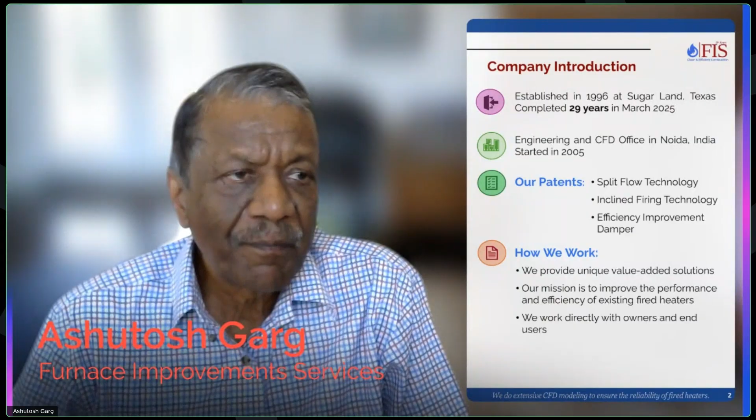We have our engineering office in Noida, India, which we started in 2005. We have 3 patents. We have a split flow patent on increasing the capacity of fired heaters. Then the inclined firing technology is on burners, how to incline the burners and reduce the tube metal temperature. The third patent is efficiency improvement dampers.

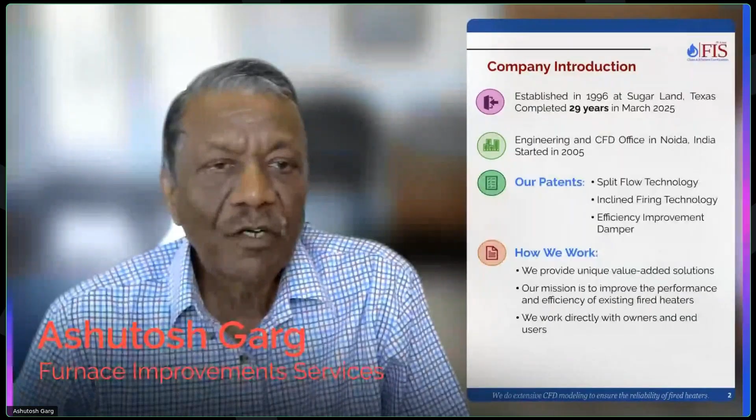And how we work is actually a very interesting story I want to tell you. In 1996, when I got a chance to tour the Houston area refineries, Houston area has 6 refineries and almost 300 heaters. And no company was looking at maintaining or taking care of existing heaters. Every company was looking at supplying new heaters. So we found this niche of talking directly to the end users, talking directly to people like you who are listening, and finding out what is wrong with the heater, what is the issue.

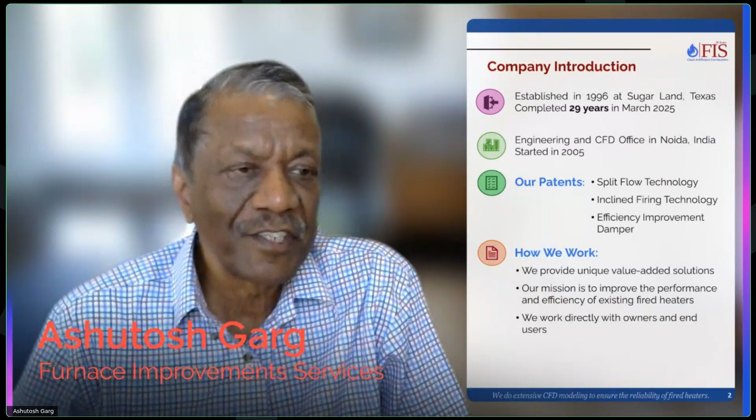So we started an exercise of direct communication with the end users, a doctor-patient relationship. And our focus has been improving performance of existing fired heaters, steam reformers, CO boilers. We work directly with owners, and we always try to provide unique value-added solutions. We take pride in doing high-quality technical work, keeping schedules. Because of the time difference, we are able to work around the clock. And our philosophy is do it once, do it right.

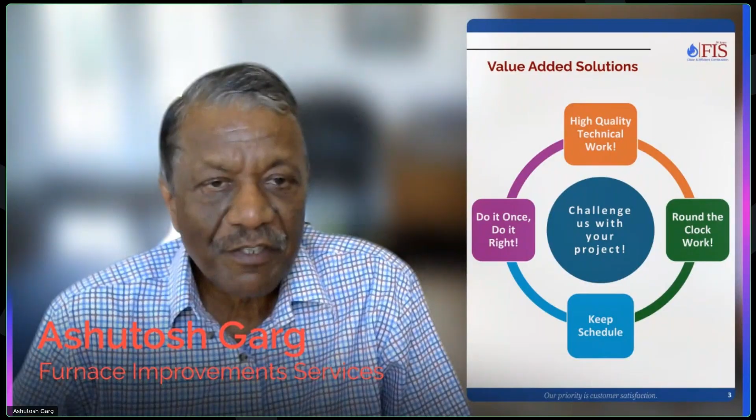I encourage you, or I request you, to send us your worst heater, and we promise we will make it the best heater. We have done it several times. So if you have a heater which is giving you troubles, which is not achieving efficiency, capacity, emissions, anything, send us the inquiry and we will make sure it is the best heater.

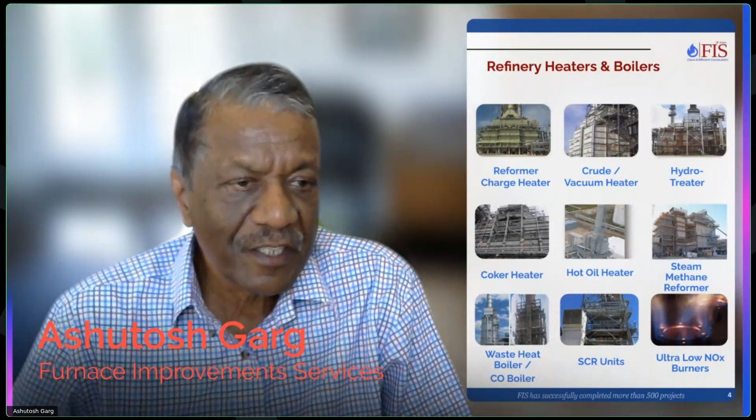We focus on refinery heaters, boilers, steam methane reformers, SCR units, ultra-low NOx burners. We focus on all types of combustion equipment in the refinery. We don't do sulfur plant units, sulfur heaters, but everything else. Most of our business is based in the US. Our largest client is Phillips 66, but we have long relationships with Countrymark, CITGO, Delek, Marathon, Hindustan Petroleum, and a lot of other refineries throughout the world.

Another thing I want to talk about is Siddharth has worked for the past 6 months. What he has done is he has taken my 50 years experience and distilled it into 3 hours of training for operators. I can tell you that it is very important to train your operators continuously so that you get the best results.

A lot of times when I go to the refineries, I find the operators telling me they are afraid of touching the stack damper, afraid of touching the burner, so they just leave it fully open. As a result, you have a very inefficient heater operation. So we have developed this heater fundamentals class, about 3 hours for operators. They can do it anytime from their control room, from their home, and the early bird pricing is only $95. If you're interested in training your operators, please contact us for this online operator training.

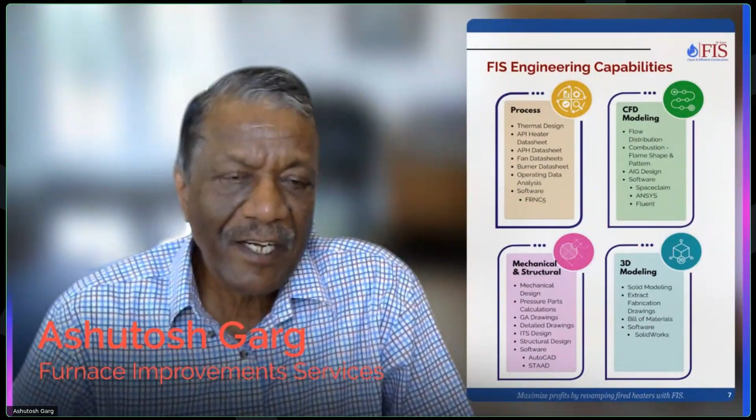As far as engineering capabilities are concerned, we have process, CFD modeling, mechanical structural design, 3D modeling. We do turnkey projects - it's not just consulting or engineering. We do design, engineering, supply, and if you want, we can even take care of the erection. So we do complete projects, and we can do the project very fast, anywhere between 8 to 12 months.

We do a lot of CFD. Our strength is process. So we do combustion, airflow distribution, fan suction, discharge ducts, AIG, and SCR units.

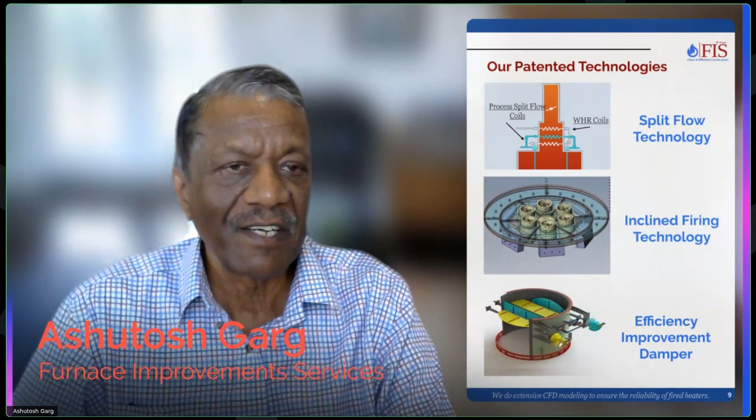Already talked to you about the technology. So inclined firing technology is related to burners, and we incline the burners anywhere between 3 to 7 degrees. You can see over here. Just by inclining the burners, we are able to get almost 100 to 150 degrees lower tube metal temperatures. We have installed it in about 12 heaters now.

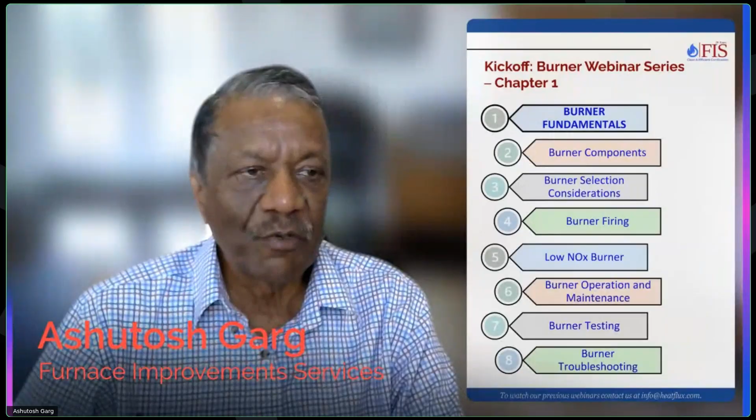Okay, so let's come back to our burner webinar. This is the course my team has put together. We may change it a little bit, but we will talk about burner fundamentals, burner components, burner selection considerations, burner firing, low-NOx burners, burner operation and maintenance, burner testing, and burner troubleshooting. We'll try to complete this course in about a year's time, 8 classes or maybe 10 classes, we'll see. But that is what we are trying to do over here today.

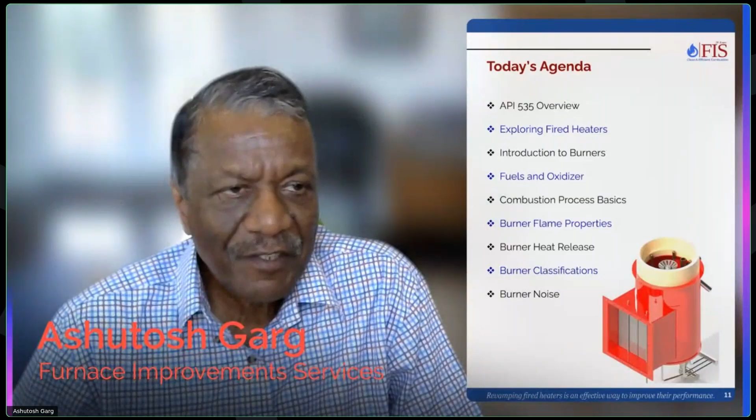So today's agenda is basically to talk about API 535, talk a little bit about fired heaters, burners, fuels, air, flames, and all those types of basic things we will be talking about today.

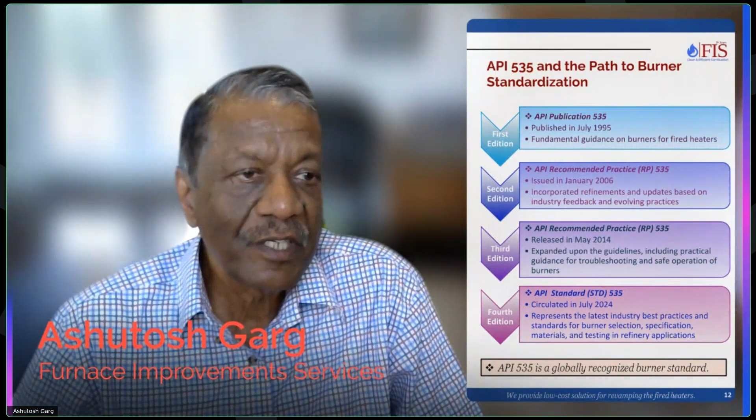So I already talked to you about API 535. What the industry is trying to do is put all their collective wisdom together and come out with burner specifications. The first edition came out in 1995. Then the second edition came out in 2006. The third came out in 2014. And the next one came out just recently, I think it was 2024.

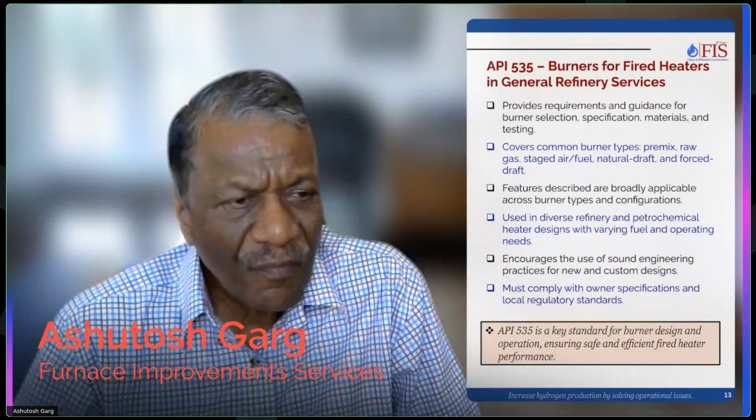If you don't have a copy of API 535, I suggest you should buy it. It's a very good document, you can even call it a Bible on fired heaters. It covers all types of burners, all types of configurations, sound engineering practice - especially if you are planning to buy burners or buy heaters, then you need a good source of information and specifications for burners, and API 535 is a really good document you may want to have.

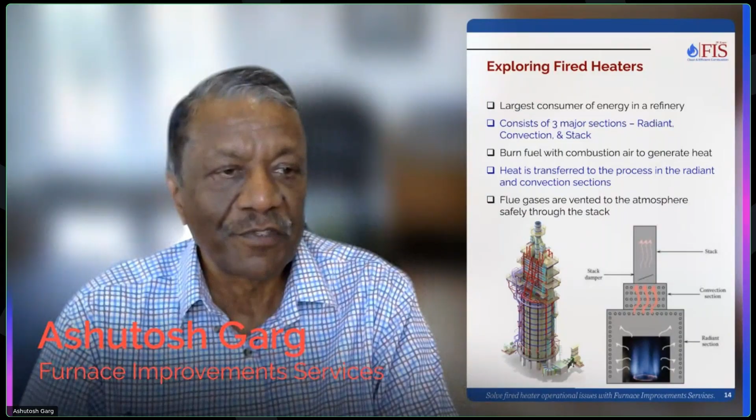So what is a burner? A burner is a device for combusting fuel gas, fuel oil, or any fuel with air or with oxygen also in a heater or a combustion chamber, and produce the desired flame pattern.

That's basically the function of the burner. You want to make sure that the air to fuel ratio is correct, the flame shape is correct, the combustion is stable, and it ignites safely. So there are a lot of requirements on burners which should be met.

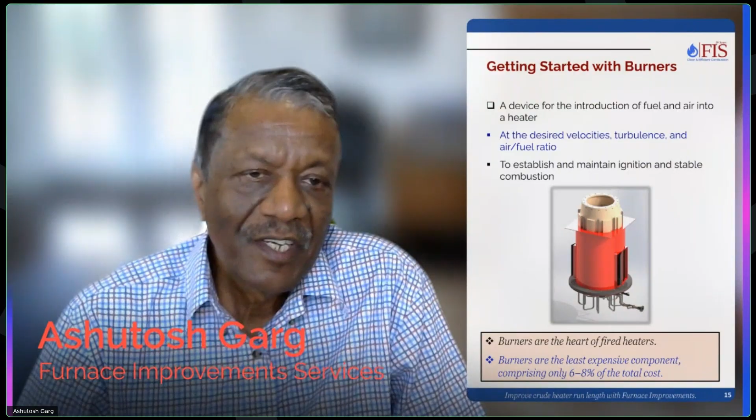As I said, burners are the heart of fired heaters. If you think about the cost of the burners, most of the time the cost of burners is insignificant compared to the heater cost. If your heater costs $10 million, the burners may be no more than 600,000 to 800,000, maybe $1 million. So in terms of capital expenditure, the burners are much lower, but they are a very important component when it comes to the operation of fired heaters.

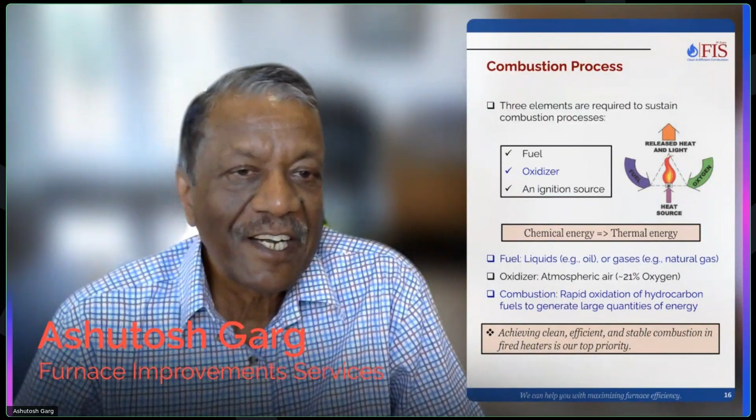Mankind has known combustion for, I don't know, 10,000 years, something like that. And combustion has been central to human survival. In the day, you get sunlight, but in the night, you have to have fire or combustion to generate heat, to generate electricity. So combustion is very basic.

And it needs three things. It needs fuel, then it needs oxidizer or combustion air, and a source of ignition. One thing which I have not told you is the fuel and air needs to be in the right proportion. And what happens in combustion is chemical energy gets transferred to thermal energy.

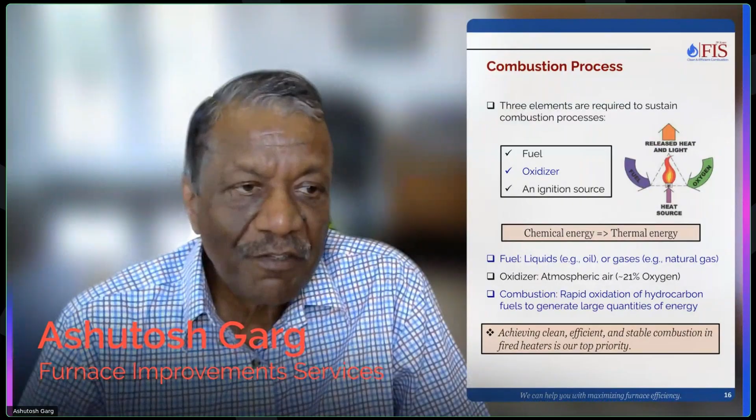So our fuels are hydrocarbons, liquid or gases. Oxidizer is combustion air or atmospheric air. Air has 21% oxygen, 79% nitrogen. And combustion is a rapid, irreversible oxidation reaction. That's the definition of combustion.

I'm sure most of you would have experienced Bunsen burners in your high school or college, Bunsen flames as part of the chemistry class. So what is our function or objective? Achieving clean, efficient, and stable combustion in fired heaters. That's what our practice is.

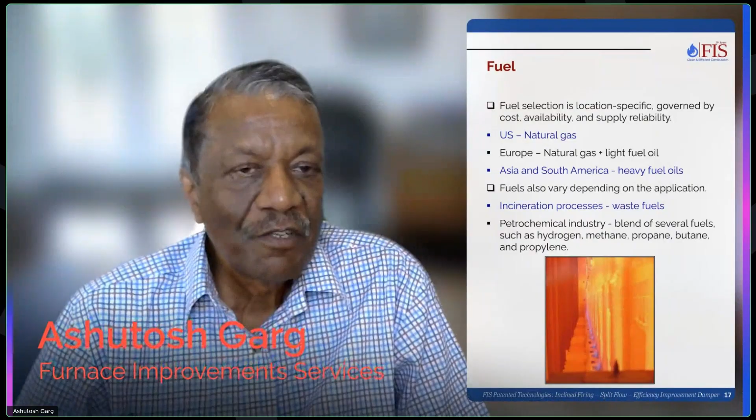There has been a lot of change in the industry over the past, I would say about 100 years. So in the old days, the fuel used to be mostly gas, but it was supplemented by fuel oil, because fuel oil was a byproduct of crude distillation. So most of the burners used to be combination burners or fuel gas fired burners. And that's how the industry worked.

But people realized that oil causes a lot of pollution, lots of nitric oxide emissions, nitrogen oxides, lots of sulfuric acid dew point corrosion, sulfur oxide in the atmosphere. So fuel oil has practically been banned in most parts of the world. There are some places where you do fire fuel oil - I'm thinking some clients in Europe, some clients in Asia, South America.

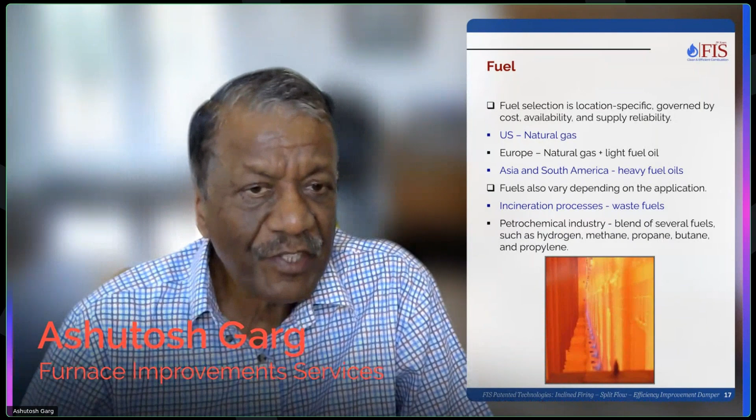We did a project recently for Jamaica, so they had fuel oil firing as an option. But things have changed, and most clients fire fuel gas now. Mostly it is natural gas, but it could be other gases also. In a refinery, you fire whatever you cannot sell. So anything and everything which cannot be sold is put into the refinery fuel gas header, and that's what you fire.

So different fuels produce different types of flames. Liquid fuels typically will produce luminous flames. Gaseous fuels will produce non-luminous blue or pinkish flames.

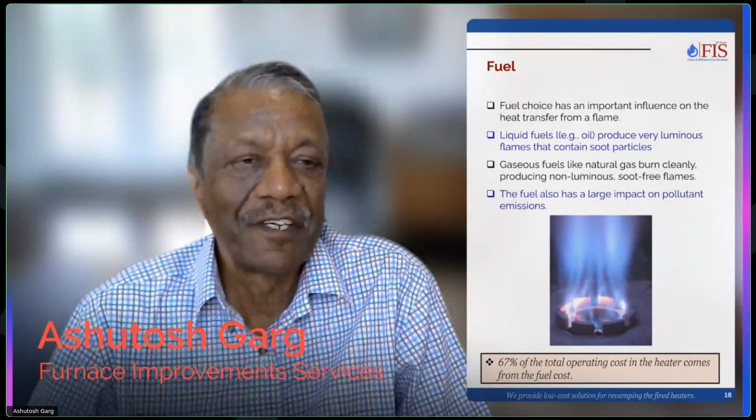I don't know how many of you have experience of fuel oil firing, but there is a difference of day and night between gas firing and oil firing. Oil firing is very, very difficult. So in one sense, once fuel oil has been banned, I would say it is good riddance. The life of operators, the life of engineers have become a lot easier with gas firing. So I'll stop at that - I can continue on burners and fuels and keep on telling you stories about my experience with fuel oil firing.

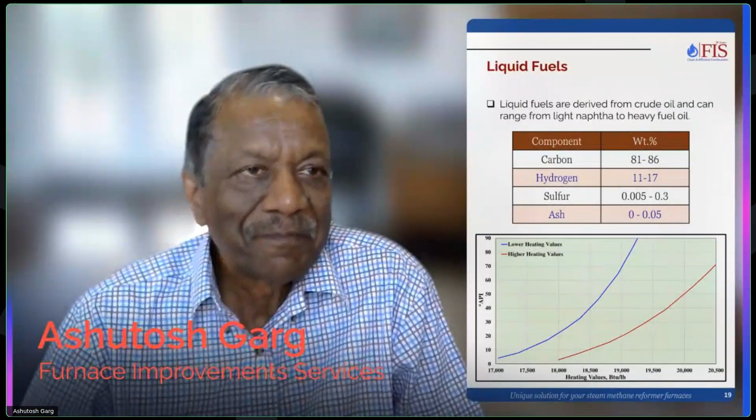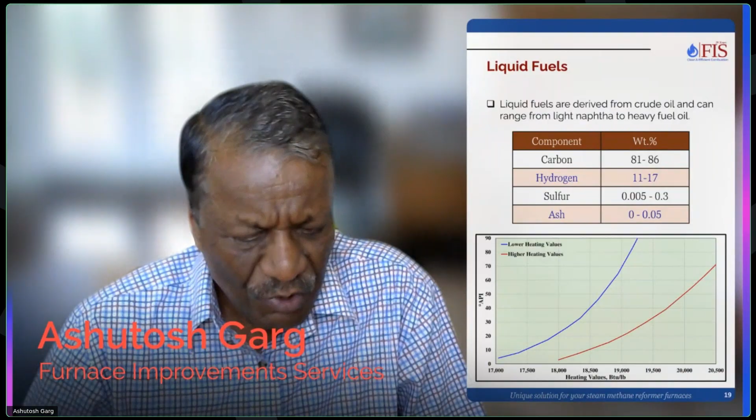But let's move on. So liquid fuels can be light naphtha all the way to heavy fuel oil, Number 6. And typical composition of carbon, hydrogen, sulfur, ash - what my team has put over here is a very clean fuel oil composition. I remember while I was in India, we used to burn heavy fuel oil, which had a lot of sulfur, almost to the extent of 5%, not anymore. And we had sodium and vanadium - high sodium, high vanadium fuels, which would cause lots of issues.

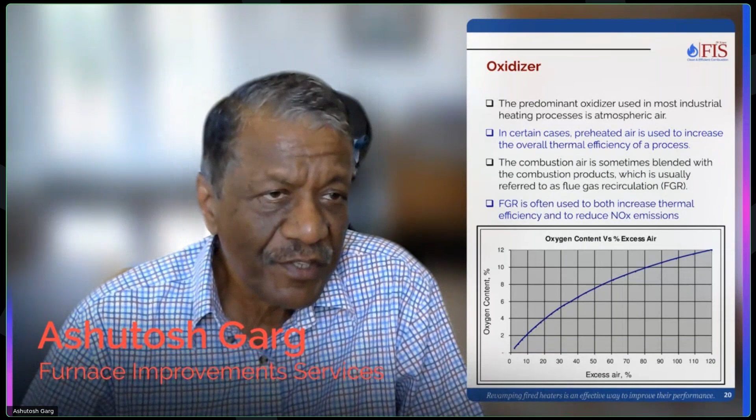As far as oxidizer is concerned, I think we are very lucky that combustion air or atmospheric air is free. Some people may put oxygen instead of air, so they do that. Some people use preheated air to improve the overall efficiency - they install an air preheater. There are also some installations where we have used flue gas recirculation to reduce NOx. Typically anywhere between 15 to 30% of flue gas is recirculated to reduce NOx emissions.

So I said in the beginning, when I talked about combustion, that one of the things you have to watch out for is the right proportion of air and fuel gas. So you have to make sure that the proportion of fuel and air is right.

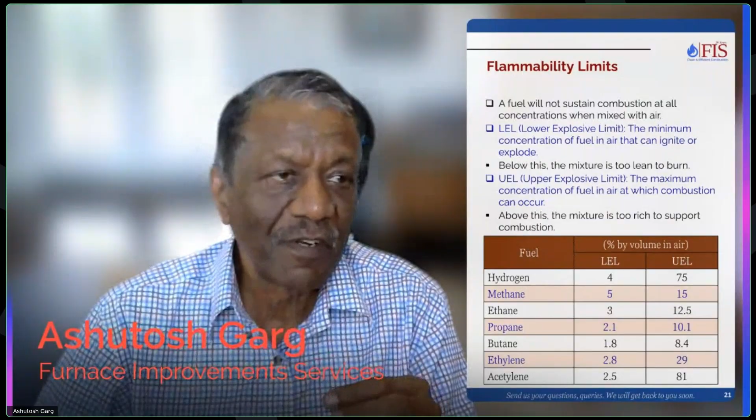So industry has two limits, LEL and UEL. LEL is the lower explosive limit or lower flammability limit, the minimum concentration of fuel in air which can ignite safely. Below this, the mixture will not burn. UEL is the upper explosive limit, the maximum concentration of fuel in air at which combustion can occur.

So you have to make sure that you are either below the LEL or between LEL and UEL. Anytime there is a shutdown in the industry, the safety guys go to all the enclosed equipment and check the presence of combustibles. They have an explosive meter, they check the combustibles concentration, and then they declare it is safe to enter or safe to start the heater. They're basically checking that you are below LEL.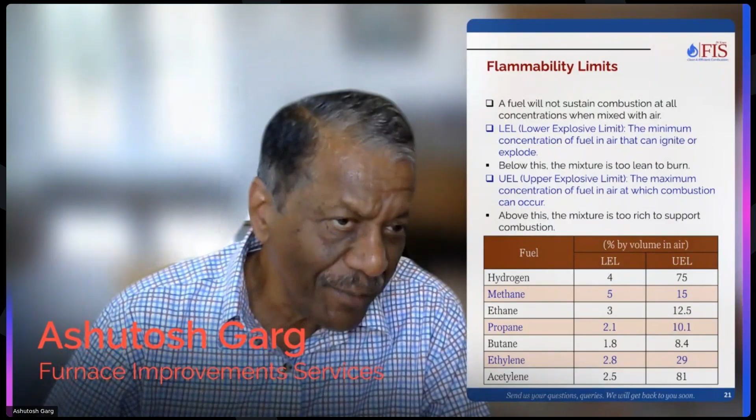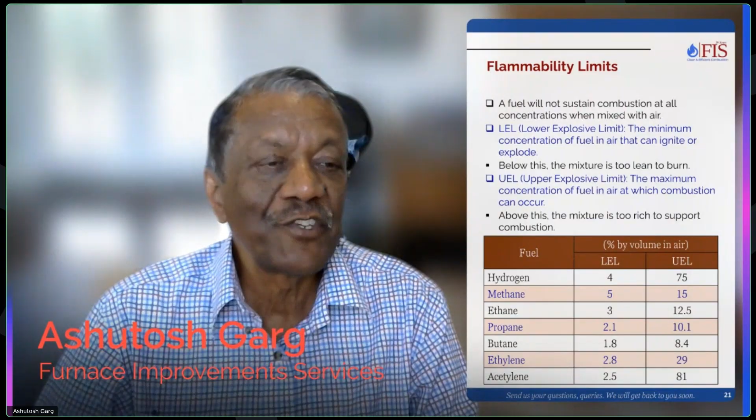These are the limits of different fuels: hydrogen, methane, ethane, propane, ethylene, acetylene. You should look at the first one and the last one - they are both very explosive. Hydrogen is anywhere between 4 to 75%. Acetylene is between 2.5 to 81%. So you can see how these things could be dangerous if you don't treat them carefully.

Okay, once we have the fuel and the mixture, we can have three conditions. First one is stoichiometric - stoichiometric means you give the right amount of air, the right amount of fuel, and you want things to burn. If it was a perfect world and you had unlimited residence time and unlimited mixing energy, you would get a good flame. But in the real world, it won't be perfect.

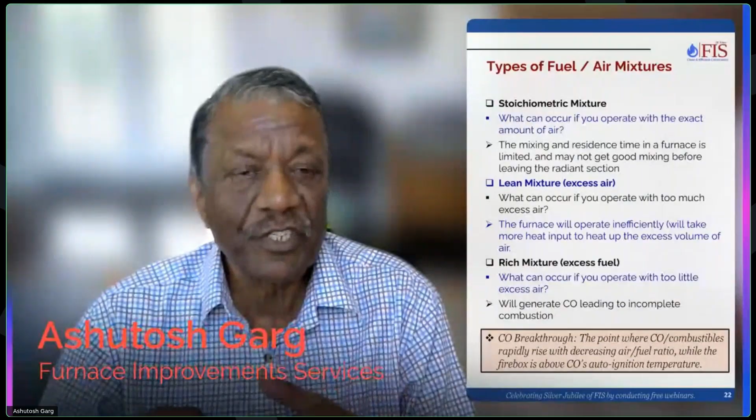I can tell you from my experience of doing stoichiometric combustion to produce inert gas. We used combustion to generate inert gas, and stoichiometric mixture or substoichiometric mixture combustion is very, very difficult. So most of the time what you have is a lean mixture - you give excess air. Air is free, so you can afford to give excess air, and that ensures the combustion is complete.

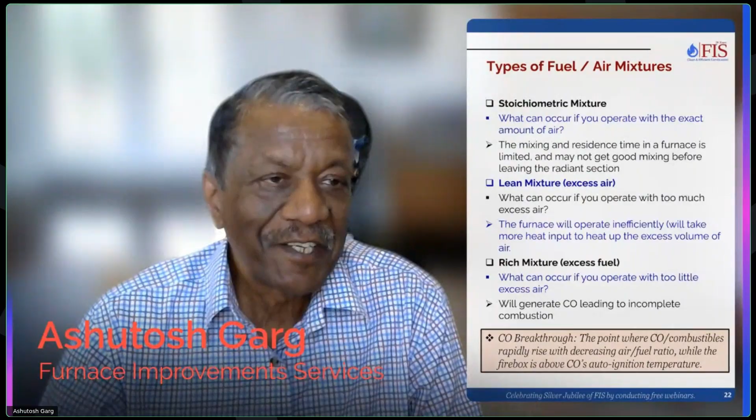But if you give too much excess air, you will be losing heat actually, because you will be heating up that extra air or extra nitrogen. So you have to make sure you are in the right range. Then you have the rich mixture - if you try to put more fuel, most of the time you will have CO breakthrough taking place, a high CO slippage. Industry puts a limit of 50 ppm for CO, since CO is poisonous too. So we have to make sure we don't exceed more than 50 ppm CO in our combustion.

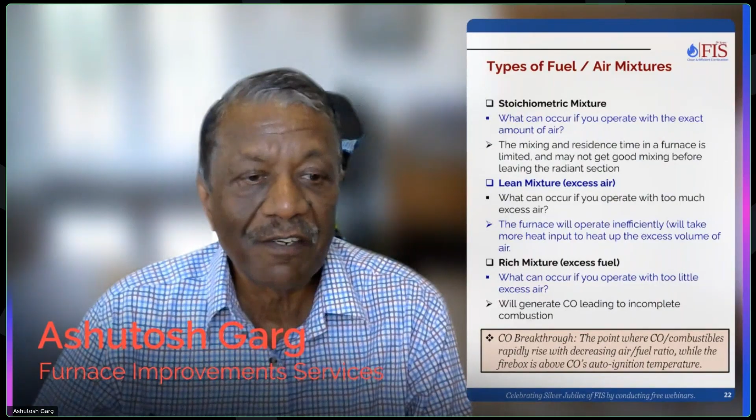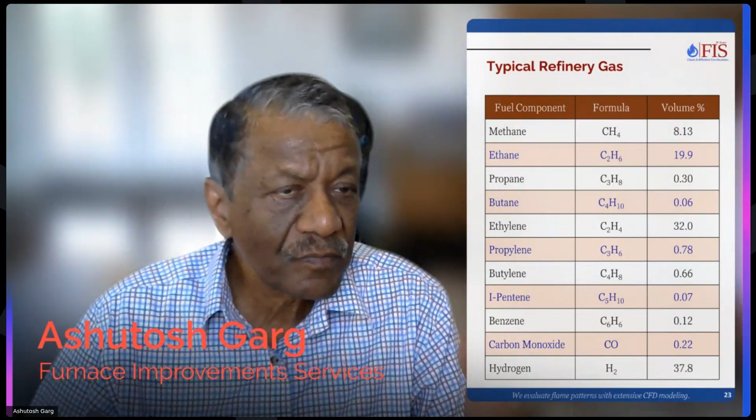This is a different fuel gas, has 32% ethylene, which normally is not there. But fuel gas in a refinery is a dumping ground, you know.

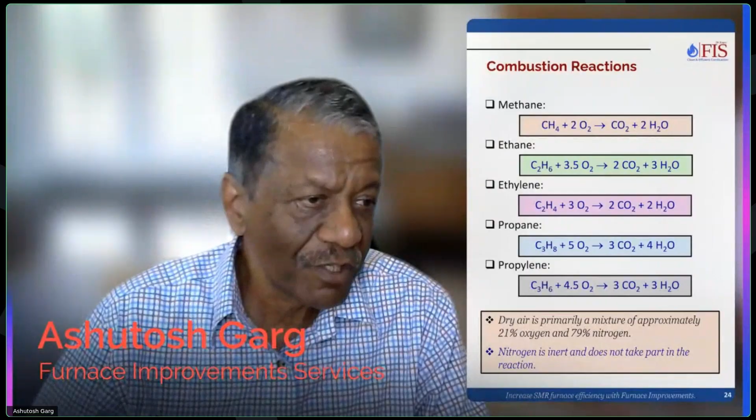I don't need to go over these - these are simple chemical reactions, balanced equations. All of you know we have hydrocarbon plus oxygen, and complete combustion produces carbon dioxide and water vapor. So these are equations - we can add nitrogen also. For each molecule of oxygen, we can add 3.76 molecules of nitrogen, on this side as well as on that side. Nitrogen does not take part in the combustion reactions.

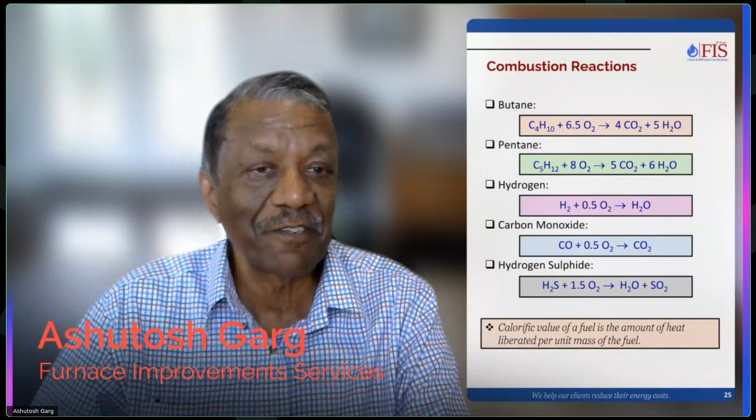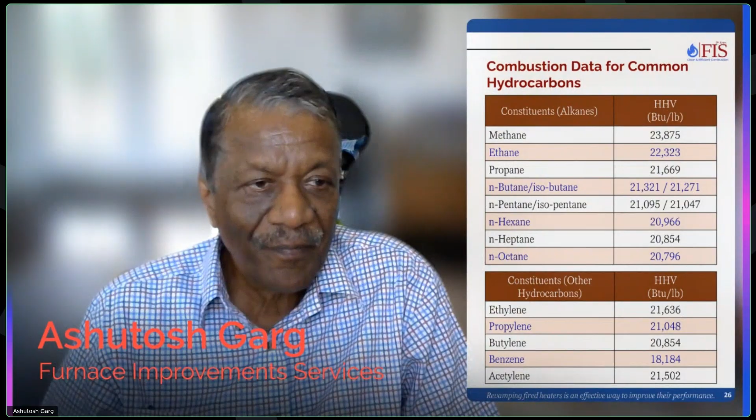For the last 30 years in the US, the stress was on NOx - reduce NOx, get low NOx burners, get SCR units, all those types of things. And suddenly in the last 5 years, even though we knew it for 50 years, the stress has been on CO2 removal. They are saying that if you don't reduce the CO2 concentration, global warming will take place. So now the issue is reduce the formation of CO2, or produce CO2 but then recover it and put it into the ground. So things have been changing.

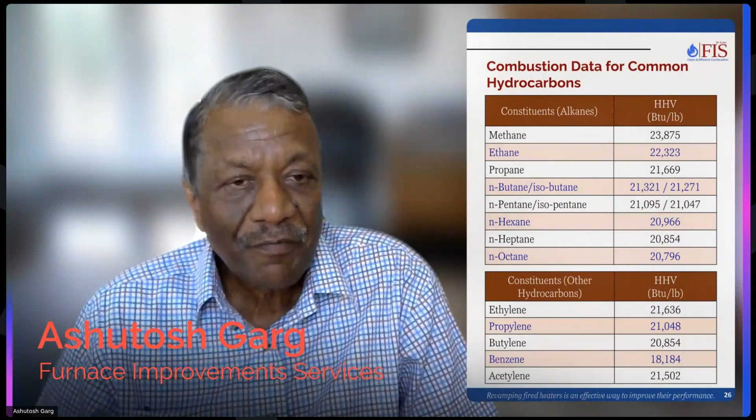Things have never been the same - that's what I saw actually. We had spent almost the last 30, 40 years working on NOx. NOx was actually only in ppm, maybe 500 ppm at the most, down to 100 ppm. But when you talk of CO2, we are talking of 10 to 12% of CO2 being generated in the combustion. So anyway, let's continue - I get deflected.

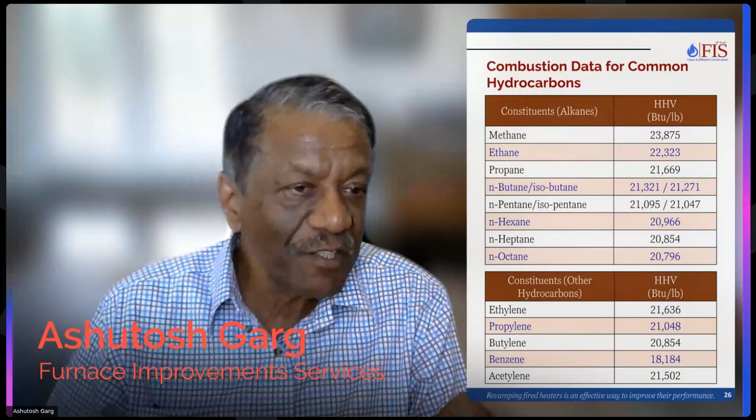So heating values - we have different heating values. I'll just talk about this in a minute, but these are the heating values of hydrocarbons. And if you see a trend, you'll see more or less everything is around 20,000 BTU per pound. So that's really good actually, in one aspect - on a per pound basis, all these compounds generate almost similar amounts of heat.

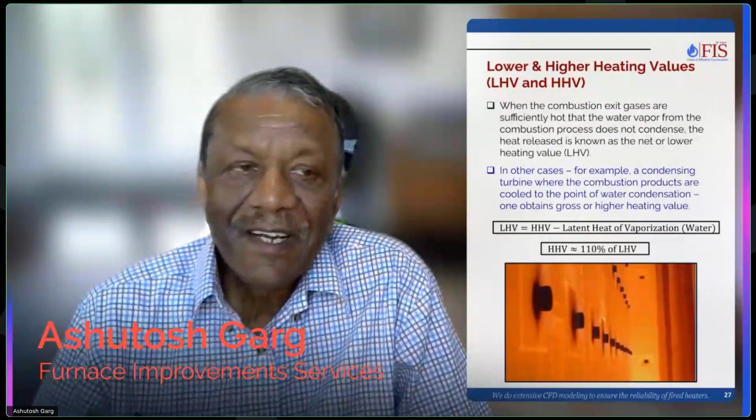So what is HHV and what is LHV? LHV is the lower heating value and HHV is the higher heating value. Lower heating value means when the flue gas we have generated has carbon dioxide, water vapors, nitrogen, and oxygen. These are the 4 components. So when the water vapors remain in the vapor form, the amount of heat released is known as lower heating value.

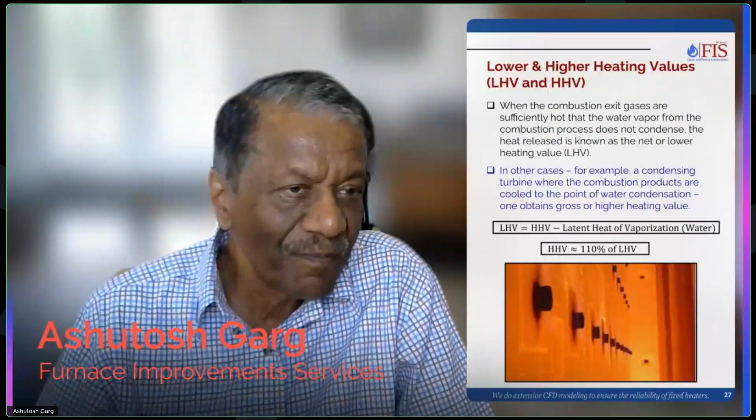And when those water vapors are condensed, giving out additional heat, then we call it a higher heating value. So lower heating value is higher heating value minus latent heat of vaporization. And a thumb rule in the industry is higher heating value is 10% higher than the lower heating value.

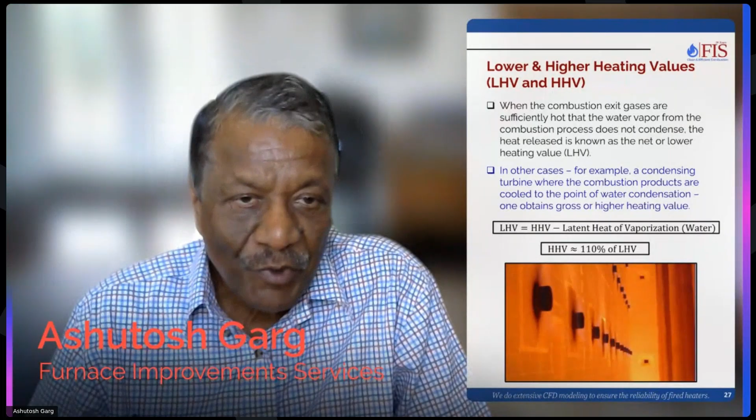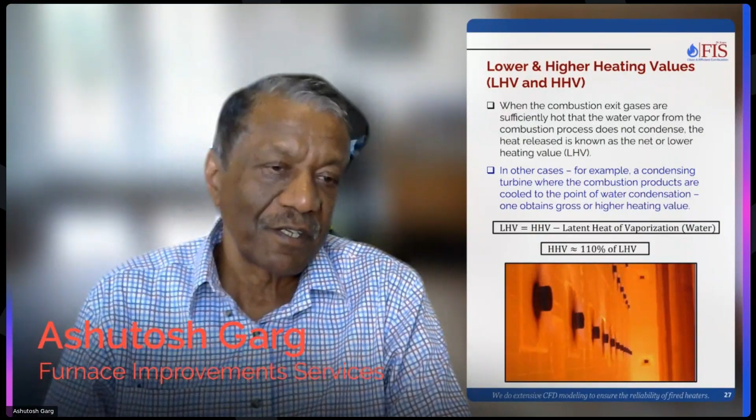Just to note one point that the process industry, the heater industry, works on the lower heating value basis, LHV basis. The utility industry, the boiler industry, and the EPA, they all work on the higher heating value basis. That's a difference. I don't know what is the reason. Maybe the boiler people came first, boilers have been there for 400 or 500 years. So whatever boiler people did, that became standards. But you just need to be clear about what is LHV and what is HHV.

Another thing we want to talk about is Wobbe Index, and it is an index to show whether gaseous fuels can be interchanged. This was more applicable when we had premix burners. If you are aware or not, I think 60, 70, or maybe 80 years ago, everything used to be premix burners in the refinery. And that's where Wobbe Index became very important for interchangeability. Suppose the refinery fuel gas composition changes, you want to make sure your burners will still be working.

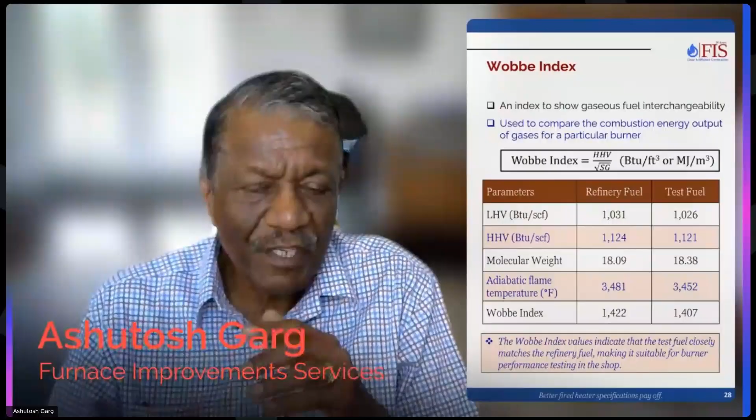So Wobbe Index was basically higher heating value divided by the square root of the specific gravity. And if you are within plus minus 5% of the Wobbe Index of the design gas, you could fire the same fuel without making any major modifications. So that was the significance of Wobbe Index. It is not relevant in raw gas burners, nozzle mix burners, or all these natural draft, ultra low NOx burners. There are very few pre-mixed type of applications.

So these are the Wobbe Index values, and you can see hydrogen or methane - methane, you cannot substitute propane, or vice versa. You can see hydrogen and methane are pretty close, but still they're about 20% off. You just want to be 5% off.

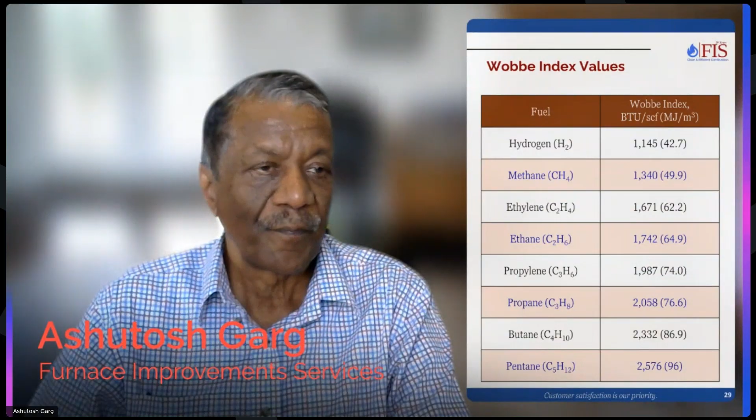So let us see what we get out of combustion. First of all, the combustion products are known as flue gases, I'm hoping all of you know that. So there are several components. Carbon dioxide is the main, could be 8 to 10% in gas fired, 10 to 12% in fuel oil fired. Water vapor, 10 to 12% in natural gas, 8 to 10% in fuel oil.

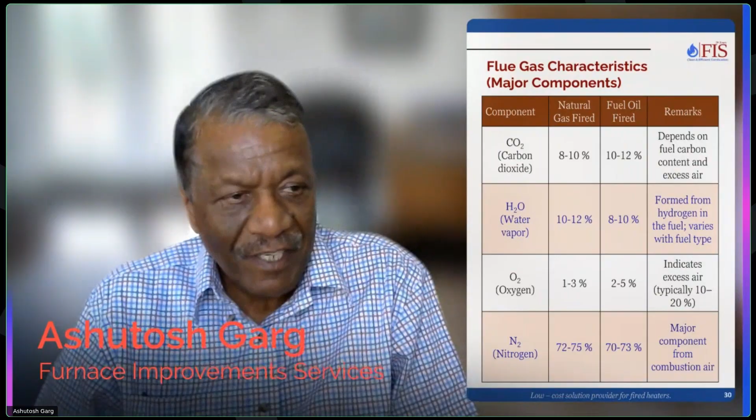Oxygen, typically 1 to 3%, in fuel oil firing it will be higher. Nitrogen, 72 to 75%, in fuel oil it will be a little less. And then we have pollutants: carbon monoxide, NOx, sulfur dioxide, unburnt hydrocarbons. So these are the important pollutants, and we have to ensure that their concentration does not go higher.

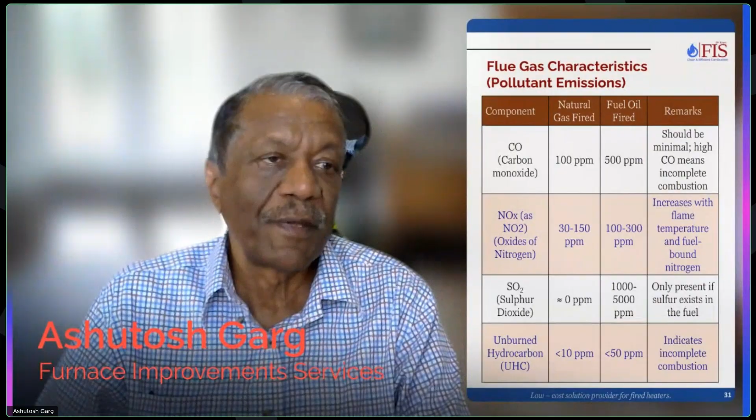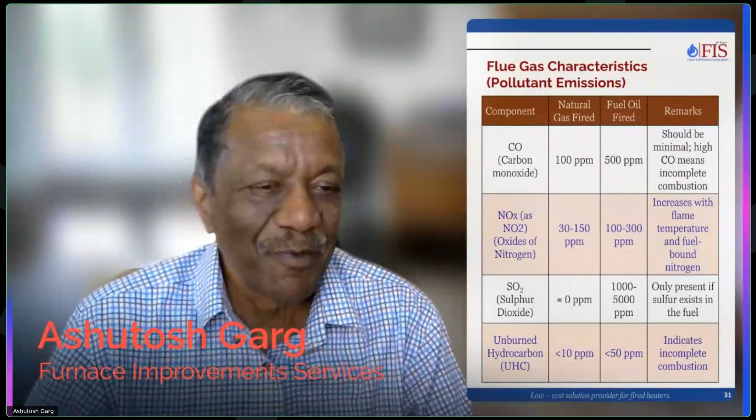If you see over here, CO could be an issue with oil firing. NOx definitely is an issue with oil firing. Sulfur could be an issue, yes, if sulfur is there in the fuels, and unburnt hydrocarbon too. As I said, oil firing is very difficult, so thank you - we are not doing oil firing anymore these days, we are only struggling with gas firing.

So another parameter you need to understand is ignition temperature, or auto ignition temperature. That is the lowest temperature required for the fuel in the air to spontaneously ignite in the absence of an ignition source. So if you heat methane to about 1300 degrees along with the air, it will automatically burn. At this point, you don't need an external source of ignition - it will ignite automatically.

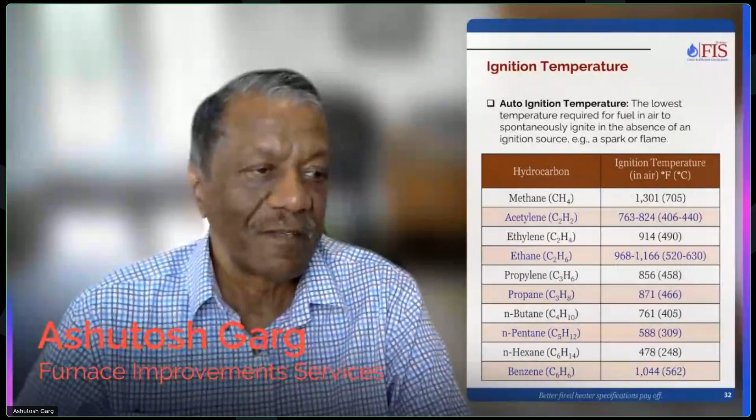Flame temperature is a very important parameter. It's a theoretical number calculated by taking the heat generated by the fuel and dividing it by the flue gas mass and specific heat. Actual flame temperatures, what we see or measure, are much lower because of heat losses.

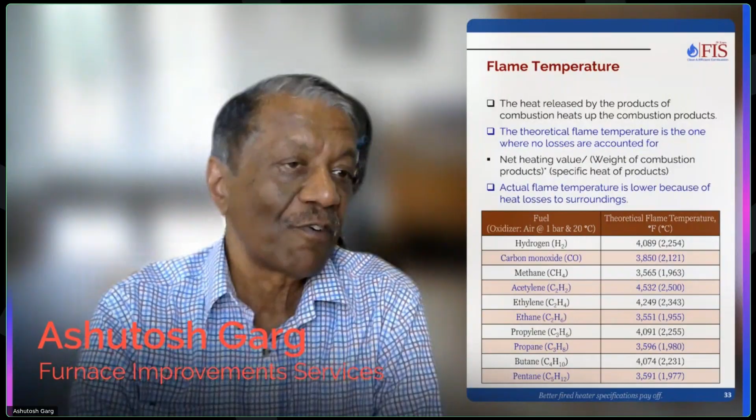Hydrogen burns very hot. Acetylene burns at 4500 degrees F. You must have heard of oxyacetylene torch for cutting metals, and one reason we use acetylene is because it's the hottest flame. But even so, all these numbers are very high. There is no material which can stand these temperatures. 3,000 to 4,000 degrees is very, very hot.

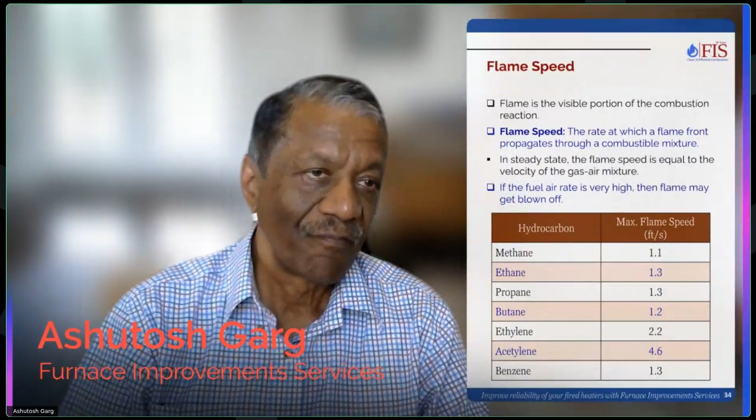What is flame? Flame is the visible portion of the combustion reaction. That's basically the definition. Combustion may be taking place all over, but the visible or hottest portion of the flame we define as a 2000 ppm CO boundary layer. Flame speed is the rate at which the flame front propagates through the combustible mixture. In steady state, flame speed is equivalent to the velocity of the gas-air mixture.

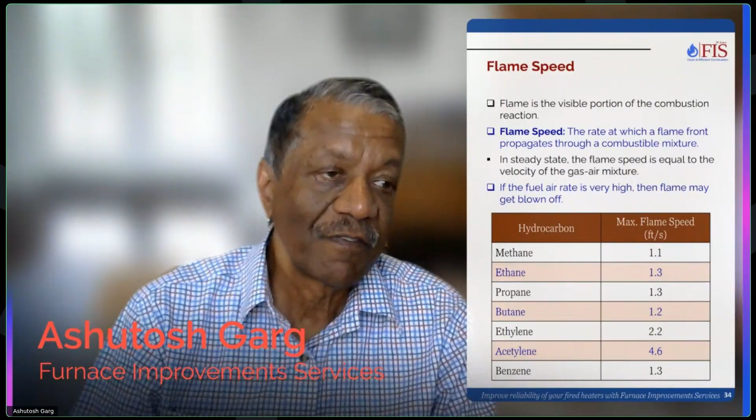If the fuel-air rate is very high, the flame may get blown off. Ethane and propane burn at the same speed. Acetylene burns almost 4 times faster. We're missing hydrogen in this table, but hydrogen burns even faster, 7 times, almost 7.5 feet per second. So hydrogen burns very fast - that's something you have to take note of. If you're thinking about burning hydrogen in your heaters, think about the flame speed.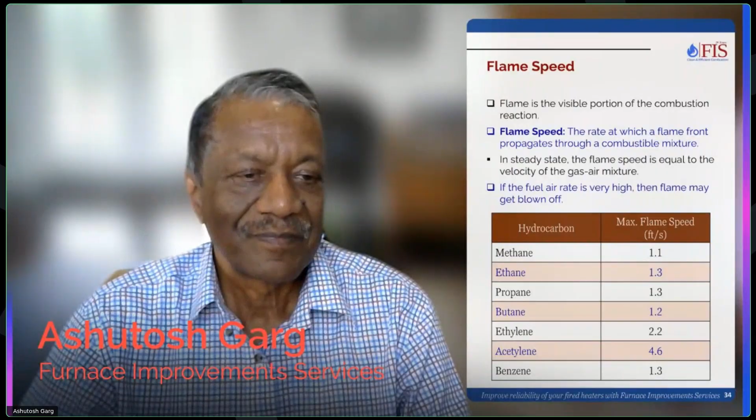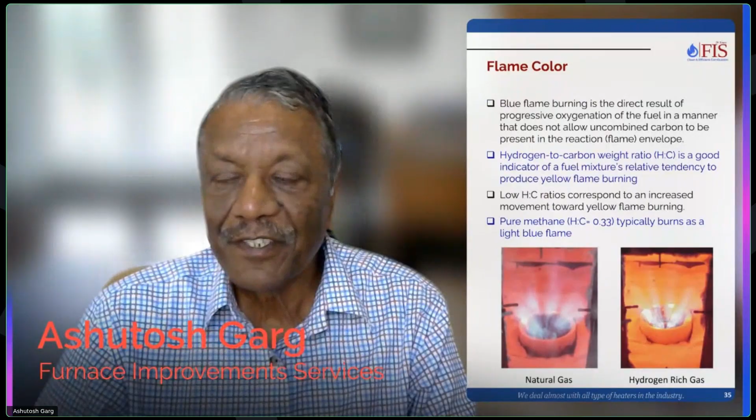Flame color is also very important, and most of the time it is a function of the fuel you are burning. Gas burning and oil burning follow different routes for combustion. Gas has a hydroxylation process, and oil burning is a 3-step process where oil is first atomized into small particles, then vaporized, then it burns. A lot of times when it's vaporizing it turns into soot, and that soot burning gives a luminous color to the flame.

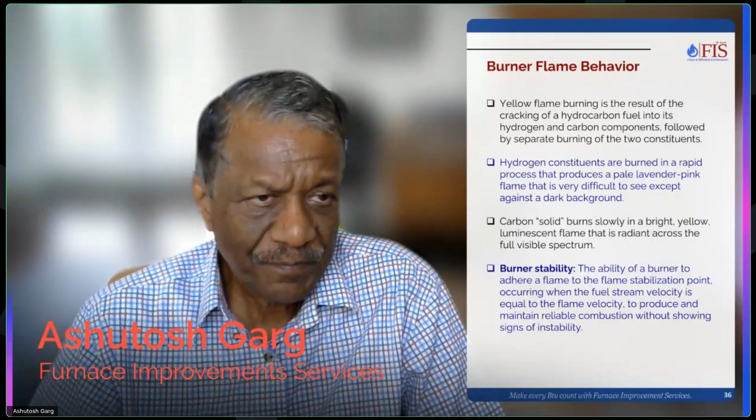So most of the time you'll see luminous flames in oil and non-luminous flames in gases. I don't pay too much attention to flame color as such. Hydrogen flame is practically colorless - you won't be able to see it. Oil flame you can see very easily. The most important thing you have to ensure is flame stability or burner stability. The flame coming out should be stable, not in spurts - it comes, it goes, it comes, it goes. That's not good actually, so make sure the burner flames are stable.

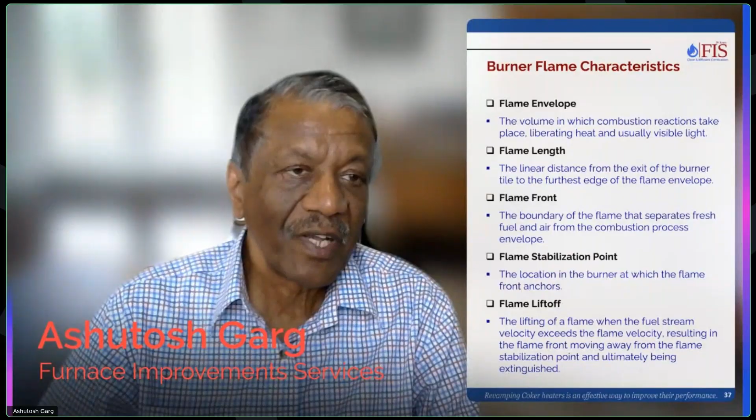There are a number of other parameters I don't want to go into detail on: burner flame envelope, flame length, flame front, flame stabilization point, flame liftoff. Most of these things are defined in API 535, and getting a copy of API 535 will be good for you to read and understand all these points. Flame liftoff - when does the flame lift off?

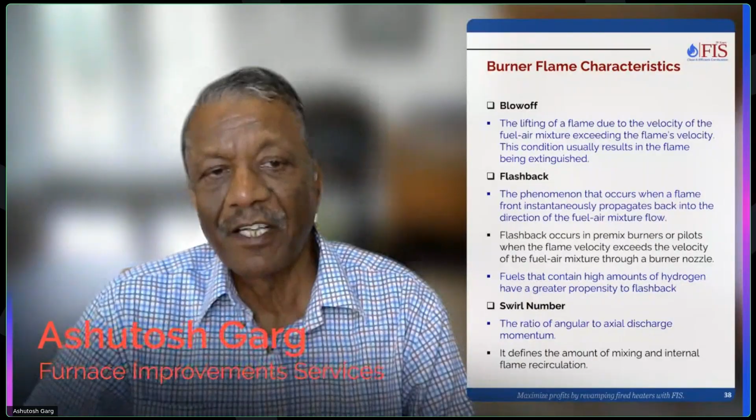When the fuel gas velocity is higher than the flame velocity, the flame will lift off the tip, and if it's very high, the flame may even get extinguished. Blow off is when the fuel gas velocity is very high. Flashback - people worry a lot about it, but it's not important these days because we don't have premix burners. Flashback happens mostly in premix burners, or occasionally in pilot burners, but very little. You have to be especially careful with hydrogen because its flame speed is very high, 7 feet per second. So if your mixture is going out at 6 feet per second, it will flash back.

Swirl number is angular to axial discharge momentum. Basically it tells you about mixing, air-fuel mixing. The swirl number becomes important.

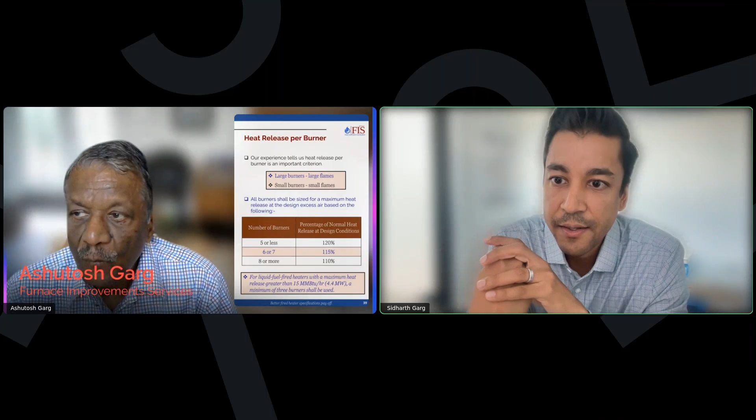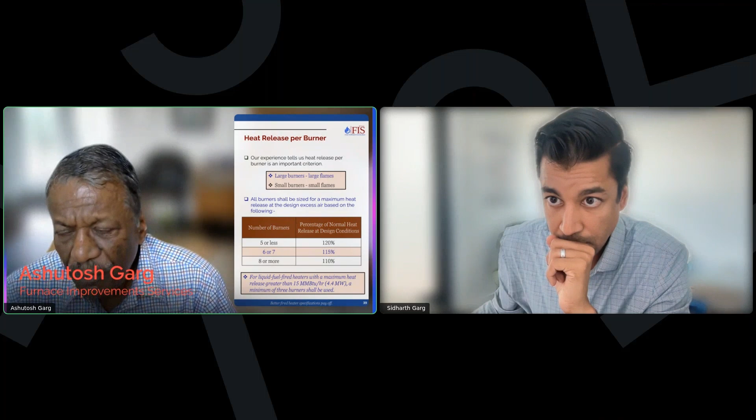One of the questions is: burner manufacturers always claim excess air at turndown case to be very high, between 200 to 300%. What is the technical reason behind having excess air, and how can we reduce it? Thank you for the question, Sidharth. There are 2 or 3 things. When you're burning at turndown, the velocities become very low, and as a result the mixing energy becomes very low. We need to supply a lot more excess air to complete the combustion. That's the reason at turndown rates the excess air could be even 10% O2, meaning 100% excess air. You can try to minimize it, or you can try something else also.

Other things, I see there are 3 questions. Let me see. What is the best way to operate a combination burner?

The best way to operate a combination burner is to operate some burners on gas and some on oil, or you can base load one of the fuels. Make sure that gas or oil is base loaded. If oil does not change, all the variations are taken care of by this.

What is the recommended H2 ratio in case some plants want to mix excess hydrogen in any fired heater? I think there is no issue with respect to hydrogen. You just have to make sure that we have the right proportion.

Burner turn down ratio, I think Sidharth just mentioned it. Turn down should not be... there's very little things we can do about that.

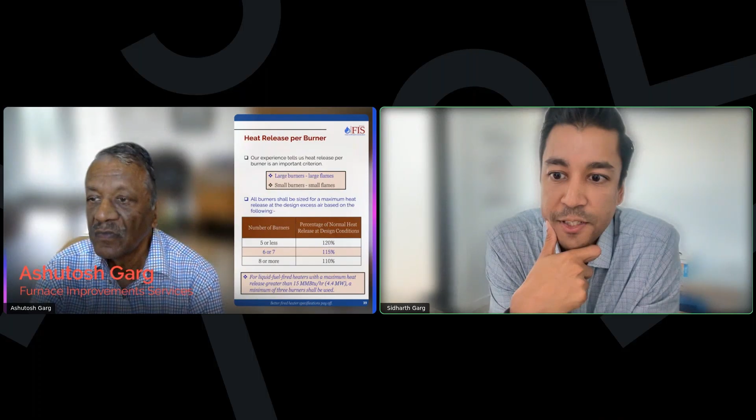And then there's maybe one last question. What are the early signs of burner malfunction or degradation, and how often should burner components be inspected or replaced to ensure optimal performance?

Good question. I think what you need to do is check the parameters like fuel gas pressure, fuel oil pressure, steam pressure, and see if you notice a change.

That will be one thing. Second is to observe the flame pattern in the heaters, because if your tile is damaged, you'll see a different type of flame. You'll see the flame going not straight, but maybe here and there. Or if your tips are plugged, you'll see that too.

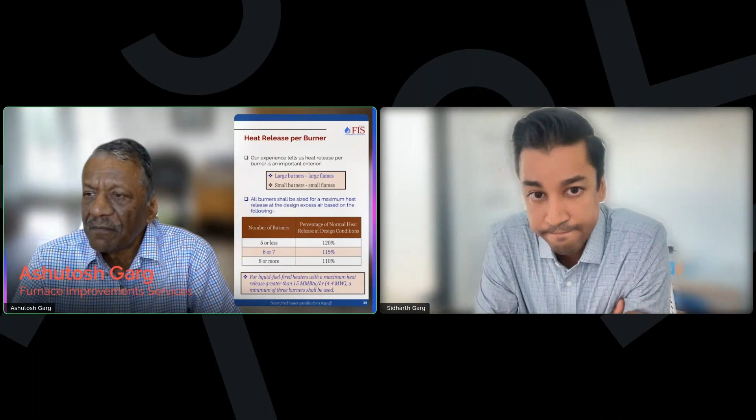So if you do a regular inspection of the burners, maybe once a shift, preferably at night, you will get better results. You'll get much better performance out of the burners.

And every turnaround, you can check the burner components, especially the tips. Those are most prone to coking, and most prone to a size increase in the tips.

Normally it happens only with fuel oil, not with gas, but it can happen. Or you may have high temperature degradation of the tip. That's what can happen.

All right, well, thank you very much. Yeah, yeah. Oh no, yeah, I was going to say the same thing.